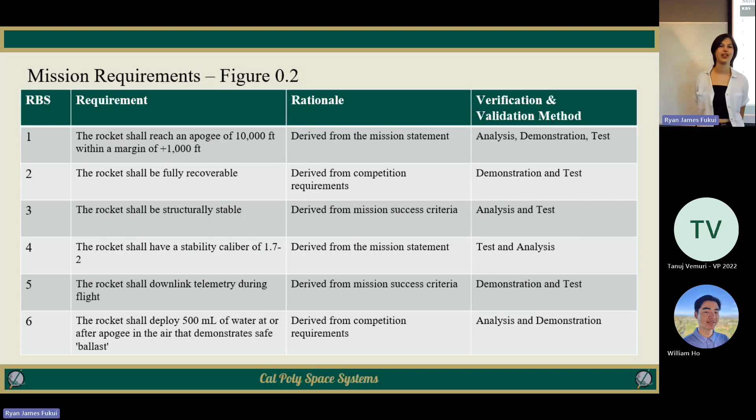So good. Okay. I guess for those of you on the recording and on Zoom, I'm the systems lead, and I just went over the requirements. I guess let's restart. I'm only going over changes for requirements and ConOps because neither of these things have changed significantly since the PDR. So the only change in requirements is adding the sixth requirement, which states the rocket shall deploy 500 milliliters of water at or after apogee in the air that demonstrates safe ballast.

And this is because FAR released their requirements in between PDR and CDR, and it said that the water release was a requirement instead of additional points. And this will be validated by analysis here at Cal Poly and also demonstration at the FAR competition. Oh, cool.

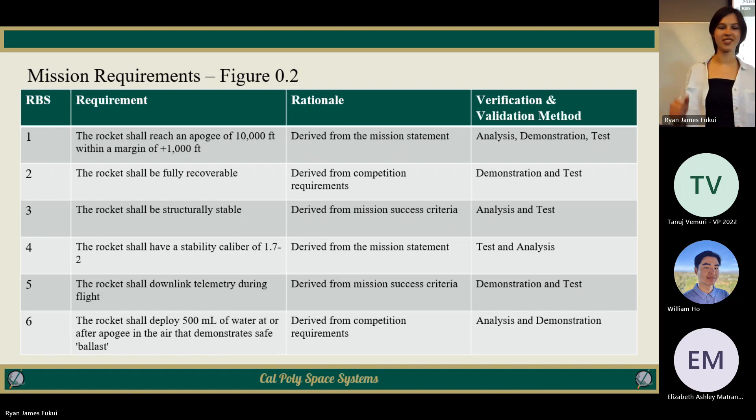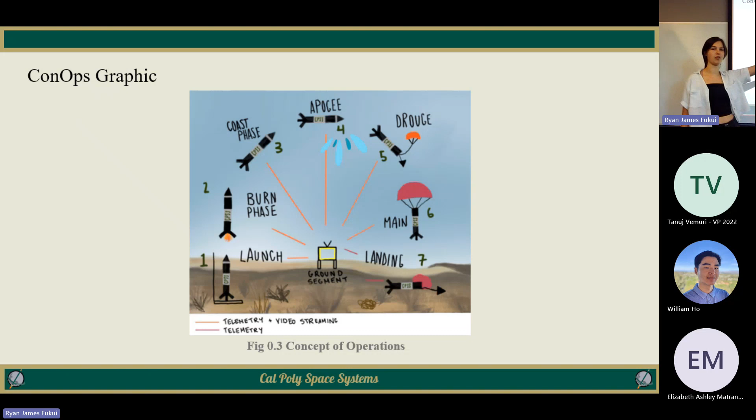Cool. Next up, we have our ConOps, which is, again, nearly identical to the PDR, so I'm not going to go over it in detail. The only change is that we have the water deployment at apogee in stage 4. The next 2 slides are also just a more detailed ConOps, and once again, the only change is the water ballast deployed, but I can stay here and have you look if anyone has any questions on the phases. Again, ConOps phase 2, nothing has changed on this slide since PDR. I'll pass it off to the aerodynamics team.

I'm back. I'm Ryan again, aerodynamics, and me and my team are going to present on some design profile stuff and analysis of that profile. So we're going to consider stability, performance, and manufacturability, as well as performing analysis on different simulations and conditions such as wind, angle of attack, temperature. So let's get that started.

Yes. Before you move on in the content, you said there would be some budget. Yes. Sorry, that has been moved to the end because I thought it made more sense since each section goes over their own individual budget. So then at the end, we bring all those together and show the total. A schedule, yeah. I don't think the schedule is fully complete, but we are working on that right now, and we have an estimate of how long it will take to complete manufacturing of our rocket.

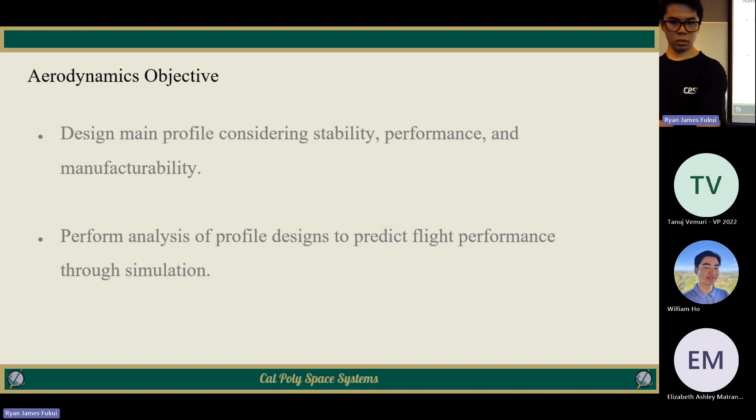Okay, here's another overview, kind of like the table of contents. First is the profile manufacturing section, and that goes over all the dimensions of the nose cones, the body tubes, and the fins. After that would be flight performance, and that has a MATLAB function and OpenRocket model. I don't know about CFD because Jack is not feeling well. So angle of attack and then weather.

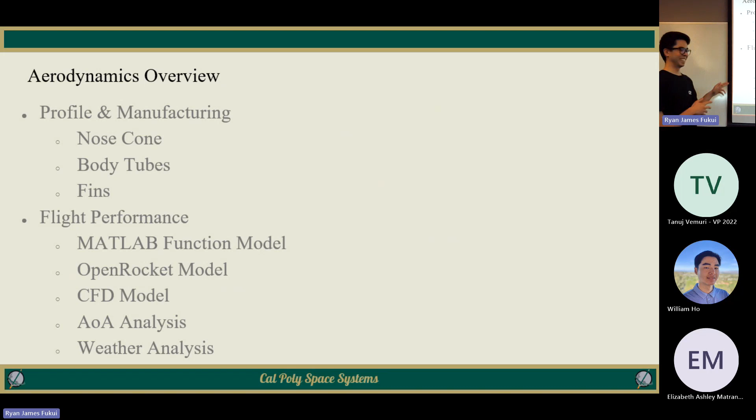Let's get started with profile manufacturing. Here is the overall model. Like I said earlier during the OpenRocket section, it's over 7 feet long. It's about 55 pounds total. And next up is going to be Tyler to present on the nose cone.

Hello, everyone. I'm Tyler. And so this is the redesigned nose cone. Before, we were going with one piece of carbon fiber wrapped around in a conical shape, but due to the payload deployment of water that's now required in the competition, we've had to modify our design a little bit, so now it's a 2-piece design.

So this top piece is going to be made out of solid aluminum, again with a conical shape, manufactured on a manual lathe, simplifying from a Von Karman nose cone. That's going to avoid a lot of hard manufacturing, just a simple angled cut. And we're going to have a 1/4-inch threaded hole in the bottom that will help attach to the rest of the system, which I'm going to show later.

Next is the nose cone transition. This is the piece that's going to be holding the water in on the way up, as well as providing the majority of the structure for the nose cone. It's going to be made out of 6 layers of carbon fiber, and we're going to do a wet layup because we haven't been able to design a way to wrap this, vacuum seal it, and put it into the autoclave. So it's just going to be a wet layup.

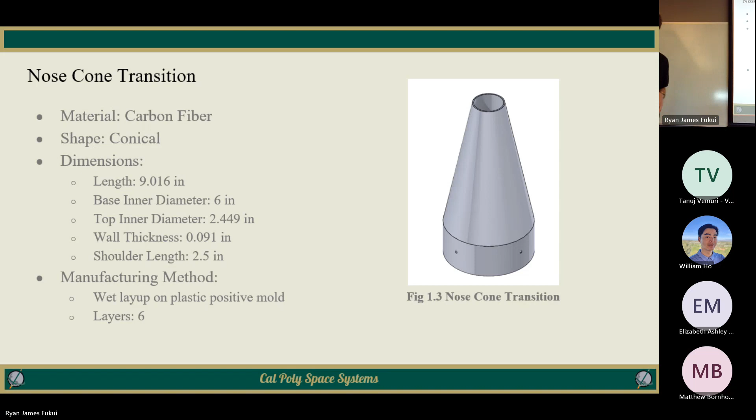So for how these are going to work together, we're going to have the nose cone tip bolted to this retainer disc that is going to be made out of any material we want. We're going to start with the 3D prints, and then we're going to test this with the expected accelerations that we're going to face to see if 3D printed plastic will be strong enough. If not, we can up it to water jet cut steel.

So on the way up, the nose cone tip is going to be held in by the aerodynamic forces and the acceleration. And then on the way down, as either the recovery system deploys or just as the rocket tips over after apogee, the nose cone tip will simply fall down, and the retainer disc will ensure that the nose cone tip doesn't fall several feet into the soil of the Mojave, while still allowing the water to get past and fully deploy.

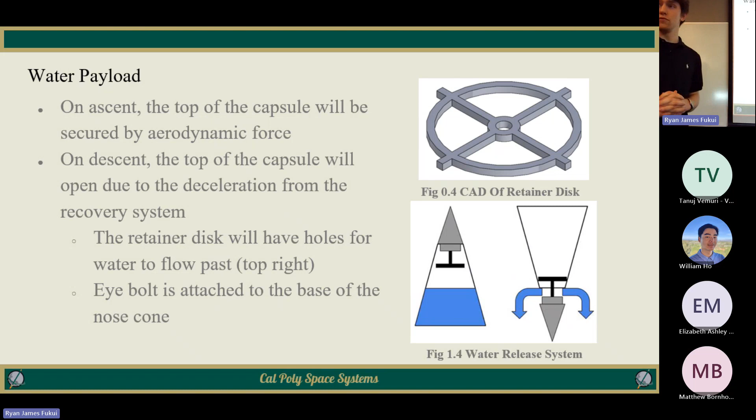I'm going to pass this on to the next system, recovery.

Hello, I'm Juan. I'll be doing the tubes and fins. So first up, we have a recovery tube. Material is still carbon fiber. Length is 27.559 inches. Our inner diameter is 6 inches, and our wall thickness is 0.091 inches. That's changed, right? Yeah, that has changed. That's a little thicker based on what structures has told us. So manufacturing is going to be pre-preg on an aluminum mandrel, and here we say 8 layers, but this is subject to change depending on which material we end up using.

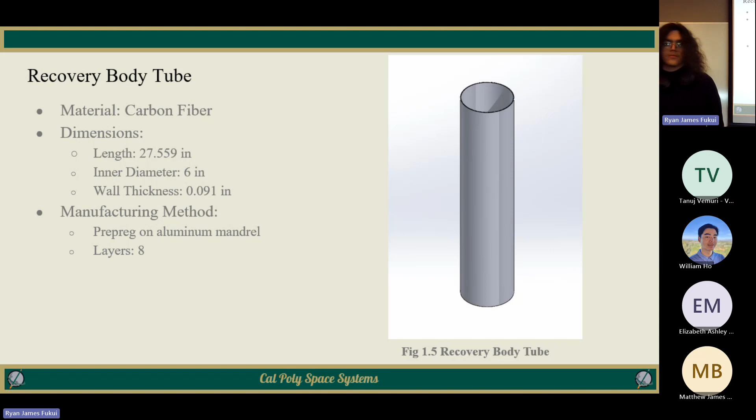Alright, avionics is fiberglass. The material's different because avionics needed it to be different for their stuff to work. Dimensions 15 inches long, inner diameter 6 inches, and same wall thickness of 0.091 inches. So we've changed from doing pre-preg to wet layup because testing results on fiberglass weren't the best. So now we will be doing wet layup. There'll be more on the testing during the structures section.

And then last for the tubes, there goes the mouse. Motor body tube. Material is still carbon fiber. The length is 33.071 inches. Inner diameter again 6 inches, and the wall thickness is, as always, 0.091 inches. And there it goes again. Okay. Again, pre-preg and 8 layers, or I guess not 8 layers, but determined by testing.

Fins. New fins. Material is carbon fiber. Here are measurements: 11.811 inches for the root chord, 7.874 for the tip chord, height of 5.75 inches, and thickness of 0.138 inches. More measurements for the fin tabs. After running through our MATLAB sim for the flutter safety margin, we found it to be Mach

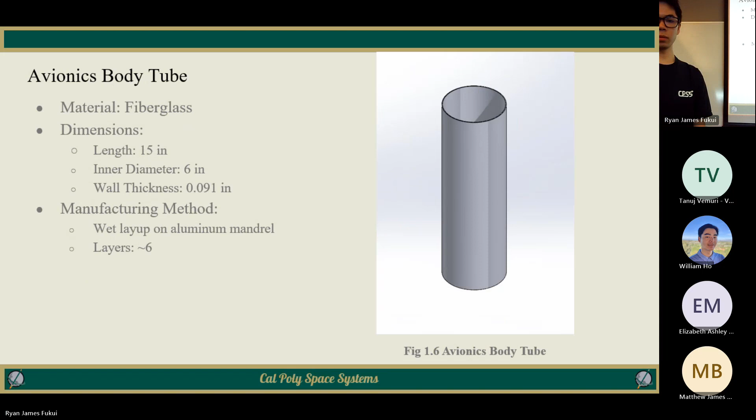Going back to the previous section. So you mentioned that the layers are subject to change. Which one? All the body tubes? All of them? Yeah, what were these layer calculations? Yes, so these layers were calculated based on the actual testing of the carbon fiber body tubes that we made. There were 3-inch body tubes that were about 8 inches and 4 inches. And we did the layers based on that calculation. However, the results of that testing were not promising.

And we are talking with a company about getting more donated. We just have to get somebody to drive down to Huntington Beach and bring it back to us. It is expired. It was for SpaceX, I believe, and they offered us 4 rolls of it. So that should be better than the stuff that was in the freezer, because you'll see in the structures section there's a slide of the results of the testing, and it shows that it is not ideal. So that's about all I can say on that.

Yeah, the layers are calculated based on the physical results of what we made and how thick that was, how many times we wrapped it around, then divided to figure out the actual individual layer thickness versus the manufacturer's layer thickness. So that might change depending on what the new carbon fiber's layer thickness is.

But with the dimensions also, were they done in centimeters? Yeah, most of the dimensions were done in centimeters, and we decided to change it to inches to make it easier for structures and manufacturing.

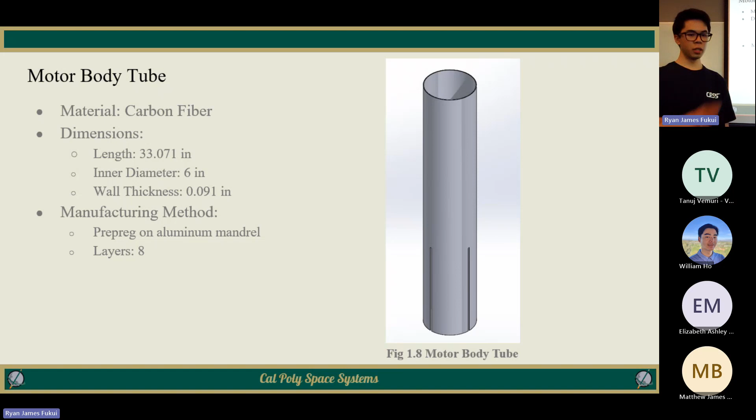I think one thing you want to be careful with, to whoever presents in the future, is significant figures. If you present a lot of significant figures like that, it's like putting a requirement on manufacturers. Yes, that is a good point. So typically, it's not in good taste to put so many significant figures when you're presenting it. Yes, thank you. We'll keep that in mind, and it's definitely important because we do not have our tolerances grounded yet, so we can't get too specific yet.

That's all for profile manufacturing. Then we'll move on to flight performance. Here are our performance goals. Target apogee is 10,000 plus 1,000. We only have the margin above because we'd rather overshoot than undershoot. Because based on what we see in the wind and temperature, angle of attack stuff, it can only go down from what the simulation says.

Maximum velocity 1,061. That's about Mach 0.95 at the launch site. That's getting really close to supersonic. Ideally, we're not going to hit anywhere close to that, and based on our calculations, we aren't there yet. So that's good. Stability, 1.7 to 2.0. That's just based on what our OpenRocket says. I think it was 1.92 on our previous slides.

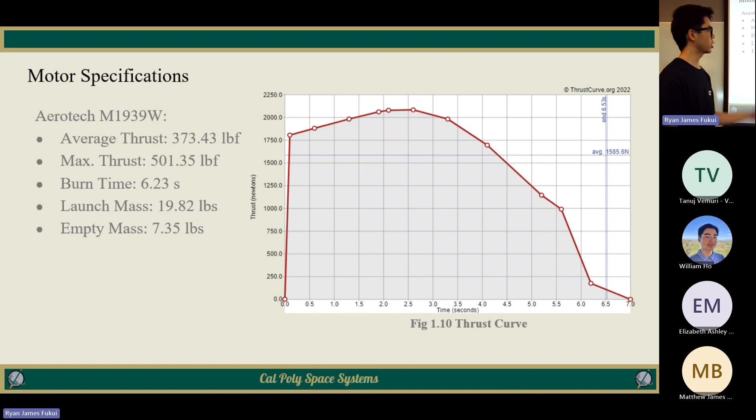I'm going to go into the motor specifications. This is kind of an internal requirement that we set for ourselves because we already have this motor, so the rocket was pretty much designed around it. It's the same motor we used last year, but the dimensions of the rocket have changed, which is why our simulations are giving us different apogees. So average thrust is 373 pound-force, max thrust 501, burn time 6.23, launch mass is 19.82, empty mass 7.35. That's all from the manufacturer. And there's a thrust curve as well. And Tyler's going to come back here and do the rocket.

So for the OpenRocket model, we were able to achieve in the no wind model an apogee of 10,820 feet. As we're leaving the launch rail, we have a stability caliber of 1.5, which is great. Anything above 1 helps keep us stable. At Mach 0.3, which is kind of the standard to measure against, we're at a stability caliber of 1.92. The max speed is almost 1,000 feet per second, which is below the Mach limit that we set of 0.95, so we know that we're not going to run into problems going transonic.

Our max acceleration, 265 feet per second squared. And now it's important to note that this is the no wind simulation. Later on, we're going to have some weather analysis based on different wind speeds and what that looks like. But in the ideal case, we are looking good.

Okay, thank you. And I am here for the MATLAB function. This is a much less precise approximation than OpenRocket because it doesn't account for wind and it's modeling the rocket as a cylinder. It doesn't take into account all the intricacies of the design. So altitude is 10,937, a bit higher, but still within our 11,000 range. Max velocity is 993, and Mach is about 0.88 at that speed. Max acceleration 243, time of apogee 25.2, flight time 250.

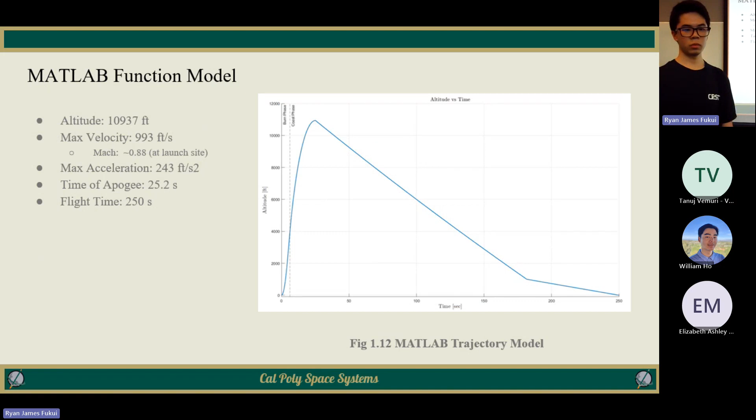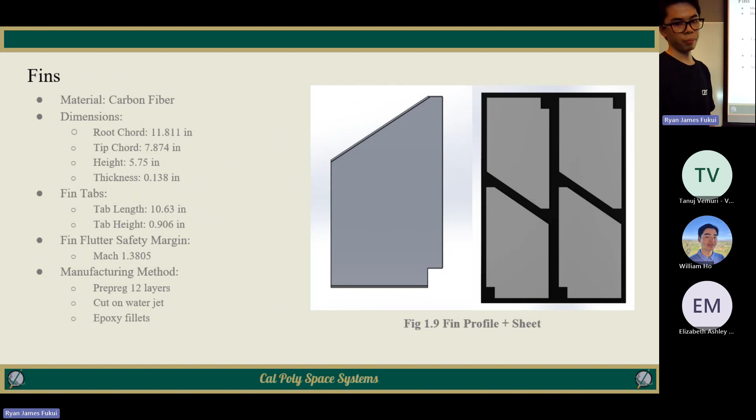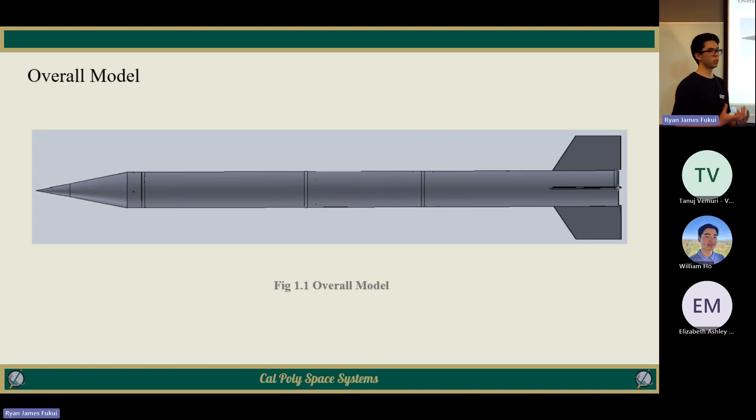I remember during PDR, your apogee was higher than 11,000 for the non-competition. And now it's a little bit below 11,000. What changed it? I guess the nose cone. Yeah, most of it was changing the nose cone, the ballast stuff has changed because now we have to have water in there and a water deployment system. The fins have also changed shape. Before, they extended further past the end, and they would have been resting on those 4 points, which was probably not a good idea to hold up like 55 pounds of weight. So this should be flat on the ground now.

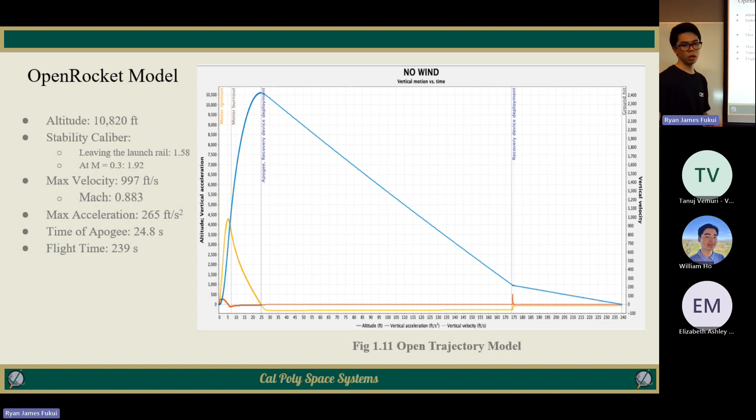The length changed a little bit to account for the different subsystems' needs, like recovery. Avionics was based on the avionics stack that has to fit inside the smaller air brakes rocket, Bebop, so we limited the avionics to that same amount. And that's about all the changes mostly.

I find the angle of attack analysis and the average weather conditions analysis was pretty insightful. Expanding, like Matthew said, with the Monte Carlo simulations and building out your probability, so you get your 98th percentile, what you expect within that range, would show further insights. I was wondering, with all of this simulation and analysis showing that the rocket would be affected greatly by temperature, which was great analysis, by the way.

What would be your approach moving forward? So would you vary angle of attack? Like if it was a hotter day on launch day, would you go up to Rick and say, hey, we have a greater angle of attack? What's your thoughts on your approach? Yeah, that's mainly my approach.

So as far as these weather simulations go, averages can only do so much because there is standard deviation to account for. And as you can see, the spread is quite different depending on the day. So the best we can really do, OpenRocket lets you turn off standard deviation and set that to 0. So it could check the exact wind speed and temperature you need, and it won't have any deviation apogee-wise.

So what we will probably do during launch day is look at the temperature and the wind speed that is happening at the launch time that we're planning on. Plug those into OpenRocket, and depending on what it is, let's say it's like 10,500, based on those wind and temperature conditions, then we'll account for that by changing the angle of attack by like 5 degrees roughly.

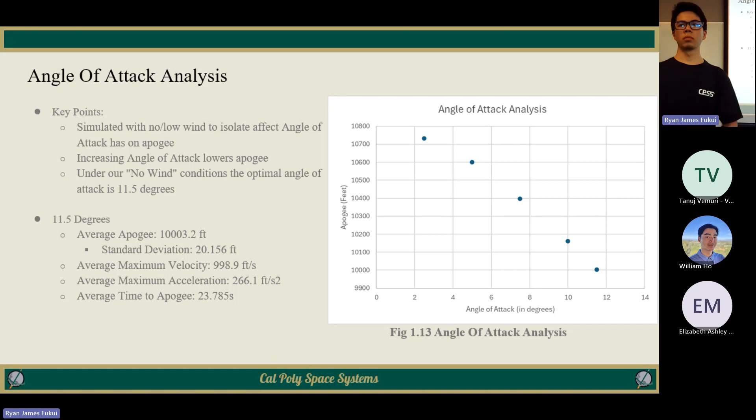And my last comment would be, I think you guys should look into the weather conditions in the morning just in case. For the air brakes project, we're having some problems ordering the motor, and we might have to order it directly to the far site and assemble it there. So just in case, we're still trying to figure that out. So what I'm saying is look into the morning.

Okay, we might launch first. I thought, okay, never mind. So new news, we might launch first. So we are gonna redo these with 8 a.m. to 12 p.m. as well, so that we can account in case we're launching earlier. Thank you for bringing that up, Ariel.

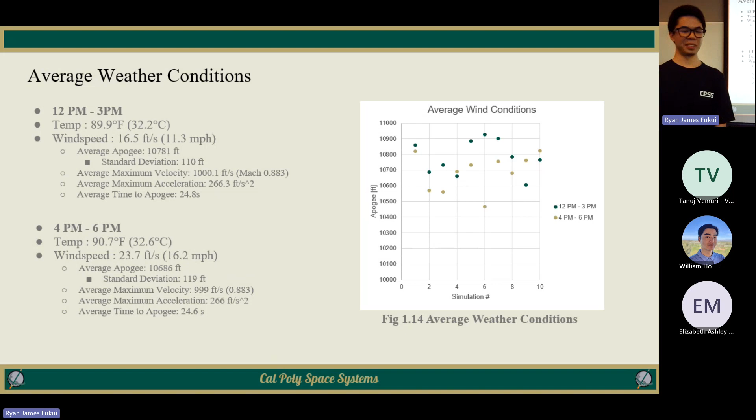As in what is keeping us, or why we don't want to? It's mainly structures, because as we're gonna bring up during structures, the numbers on that are looking a little iffy based on the material that we have. And going supersonic will introduce shocks and other forces that we will have to account for. It just will make it more complicated, and our structures team probably does not want to do that. If there's more structures questions, I'm gonna be back to talk about structures as well. But yeah, if there's no more aerodynamics questions.

Our lead is in the chat right now. She could not come today because she's sick. Elizabeth, say hi if you're here. Otherwise, Calvin is gonna be here. Hi. I'm Calvin, and I will be presenting structure slides today.

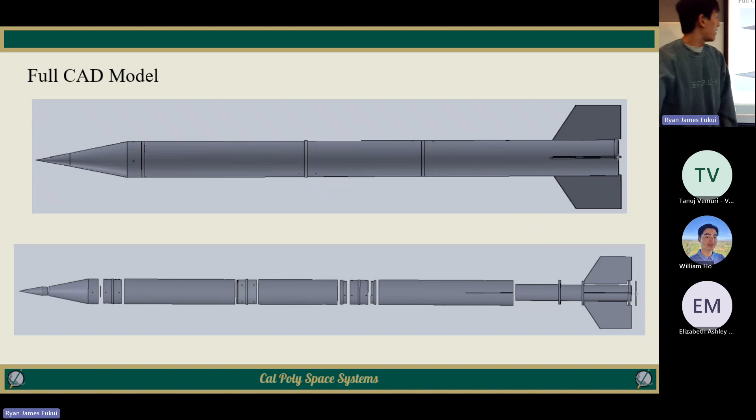So here's our full CAD model, both put together and apart. The first thing we're going to talk about is the motor mount. It's going to be a 98 millimeter cardboard tube, which is 3.858 inches, a length of 36 inches, which is more than the motor, so we're good on that. And the wall thickness on that's going to be 0.1 inches.

We'll attach 3 centering rings made out of plywood with an inner diameter identical to the diameter of the cardboard tube and an outer diameter of 5.984. The thickness for those will be 0.5 inches. And then we'll have our fins slotted in between the bottom 2 centering rings. They will be epoxied, as well as the centering rings, to the cardboard tube. And this whole assembly will be put together and then slid into the body tube.

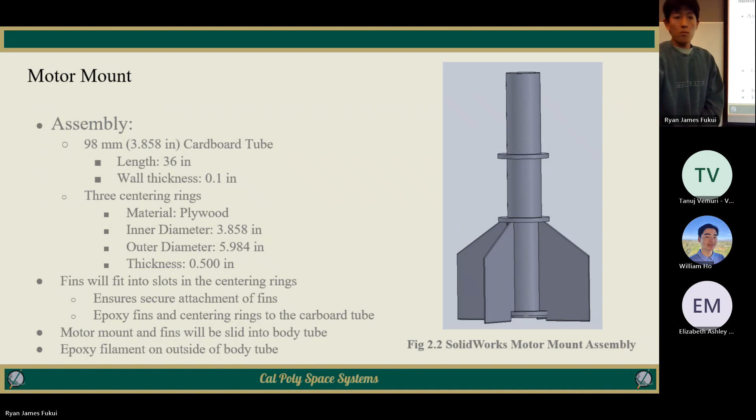In terms of couplers and bulkheads, we'll have 3 couplers and 2 bulkheads. They're all shown, I guess, in that figure there. 2 couplers are for the recovery system, and then there will also be a coupler between the motor mount and the avionics tube. Each of these couplers will have 4 M6 holes drilled perpendicular to each other, and then they'll be secured using M6 bolts. The safety factor that was calculated for each bolt is 15.2.

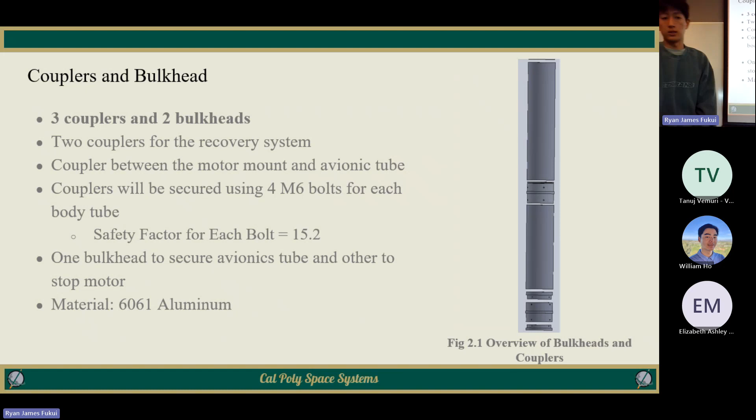Additionally, we'll have 1 bulkhead to secure the avionics tube, and another one to stop the motor from flying into the rest of the rocket. All of these will be constructed with 6061 aluminum. This is the assembly for the motor mount coupler and avionics bulkhead. Like I said, they'll be constructed using aluminum. The bulkheads will be constructed using aluminum rods, and the coupler in this case will be constructed with an aluminum tube. The length of the bulkheads are identical on each side. They'll each be 0.748 inches in length.

The diameter of the wider lip will be 5.984 inches, and the diameter of that narrow extrusion there will be 5.591 inches. The coupler will be 5 inches in length with an outer diameter, or those should be flipped, an outer diameter of 5.984 inches and an inner diameter of 5.591 inches.

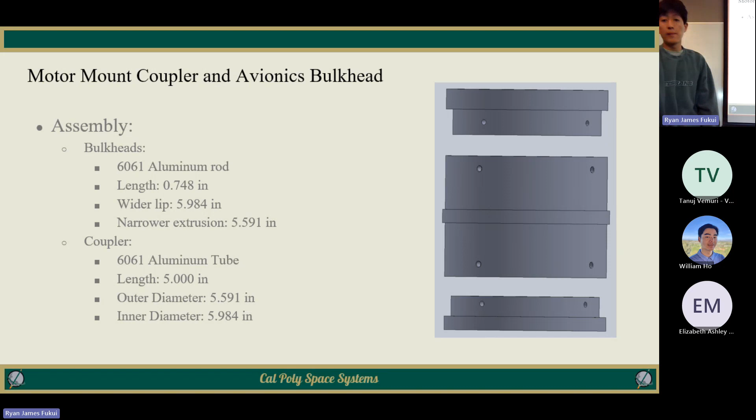For the recovery pressure vessel couplers, there will be 2 of them. The outside profile will be identical, but the inside bulkhead-ish part will be a little bit different, and Ariel will talk more about that in the recovery section. But there will be a 0.1 inch groove for an O-ring. The upper coupler will be 3 inches in length, and the lower coupler will be 5 inches in length. And those inner and outer diameters are identical to the motor mount coupler as well.

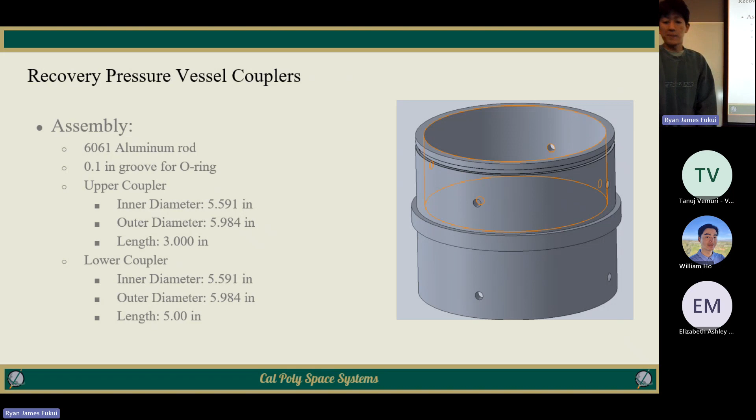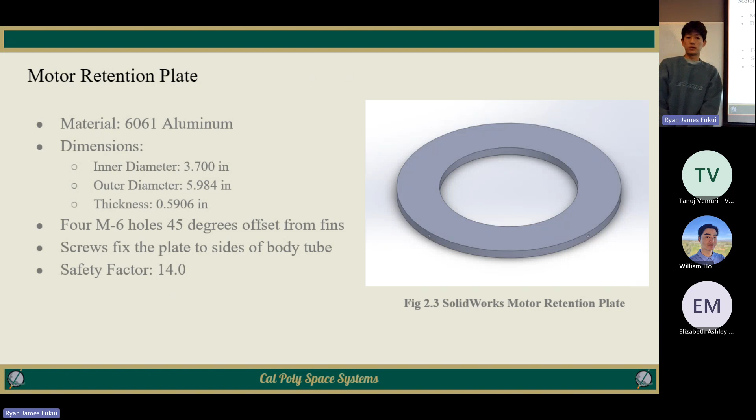Rail buttons were an issue last year because we used 1010 rail buttons, which is for a 1 inch width launch rail, when our rocket needed a 1.5 inch width launch rail to launch off of. So this year we will be using 1515 rail buttons to not let that happen again. We will either be using the standard rail buttons or more aerodynamic rail buttons for less drag, because those are what's in stock right now.

The rail buttons will straddle the center of gravity, with the lower one being placed just above the bottom centering ring in order to easily load the rocket onto the launch rail. And the upper rail button will be located just below the recovery bulkhead. We need to make sure to place these in between 2 fins so that they don't interfere when we're loading onto the launch rail. These rail buttons are taken from Apogee Rockets. The website is reliable, and FAR recommended it as well.

For rail buttons, and also motor mount, do you have manufacturing plans? Because I know last year those 2 were kind of bad putting in. In terms of how you're actually going to get the rail buttons in there, because last year we did a jank little magnet way of getting it in there, and I don't know if that's gonna work. We do not have manufacturing plans yet. Yeah, because both of these spots are not the easiest to get to. So we'll definitely have to look more into that.

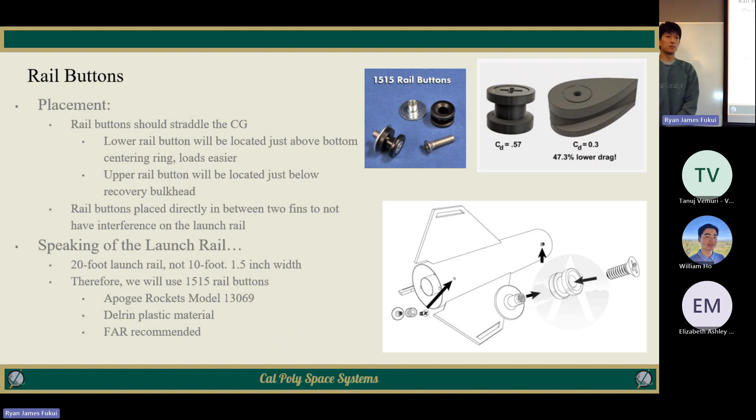And then the motor mount shouldn't be too bad. We just have to, again, make sure we put that in after everything else.

For material justification, we're using 6061 aluminum. It's been used on many different things, such as pipelines, aircraft, and automotive parts. It's reliable under large amounts of stress, and it has a high strength to weight ratio. Additionally, it's an easier material to work with in the shop, so that'll make the manufacturing team's job a lot easier. We also have some extra aluminum in the hangar that we could possibly use to save costs as well.

For fiberglass, we're going to be constructing one of the body tubes out of fiberglass because even though it has less tensile strength than carbon fiber, we need it to allow the radio signals from the avionics section to go through, because carbon fiber blocks the signals, so we wouldn't be able to get anything from avionics if we use carbon fiber. And then carbon fiber, we've had experience with; it's strong, low density, and easier to mold.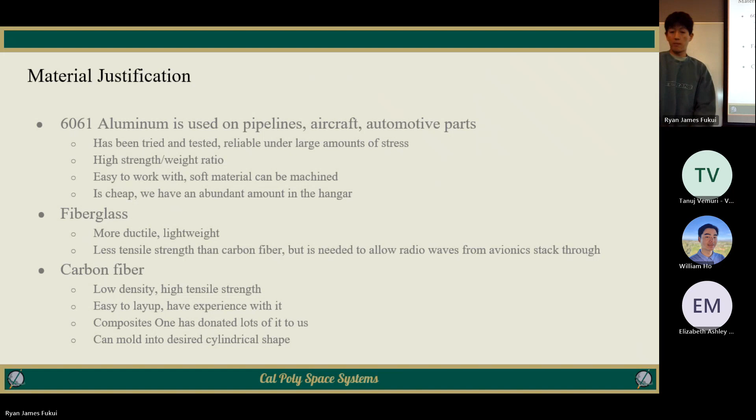Okay, and now I'm gonna be, thank you, Calvin. You're gonna have to come back after this though, I think.

So I'm gonna talk about the testing that we did. These were, like I mentioned earlier, about 3-inch diameter tubes. The short one, or the small one, we were recommended to do about 1 inch tall. The medium one was our 3-inch one, and the long one was about 7-8 inches.

So as you can see from the carbon fiber, it does not look good. The results of our compression test were 70 megapascals. The manufacturer data says the compressive strength should be 552 megapascals. That's not even a fifth. It's almost an eighth of what it should be. This is probably due to the freezer, or we just did a really bad layup.

Considerations: the wall thickness was greater than the fiberglass samples, so the wall thickness was about 0.3 centimeters, and the actual one should be about 0.23. So it was a little thicker than it should have been, but the fact that it was thicker and the compressive strength is still way underneath, I think making it thinner wouldn't help our case, because that would be counterintuitive.

New donated carbon fiber: like I mentioned, Huntington Beach has carbon fiber just waiting for us that we have to go get. Hopefully someone will be able to get that as soon as possible before we start actually manufacturing.

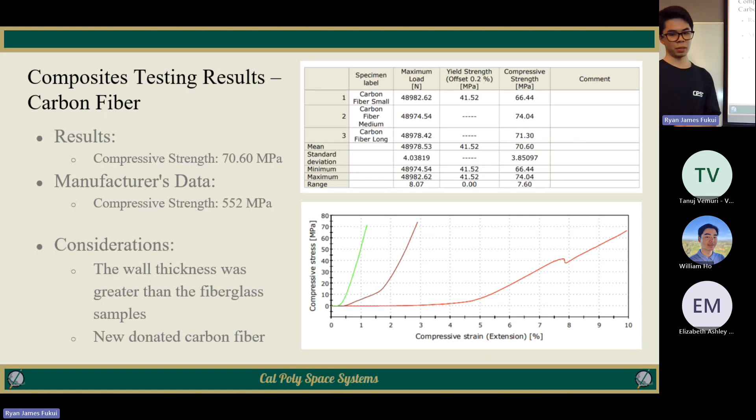There are the graph numbers, and that's about all I've got for composite testing. Oh, and these walls were about 0.1-ish, so they're about half as thick as they should have been. The thickness that the manufacturer gave us for this fiberglass is way off from what it actually turns out to be. We thought it was gonna be 0.74 millimeters, which would only take 3 layers to get as thick as we need, but it actually was more like 0.26, a third of what the manufacturer said. We ran into that issue last year as well. We just did another wet layup over that to make it thicker. That's everything for composites. There's no questions in the chat.

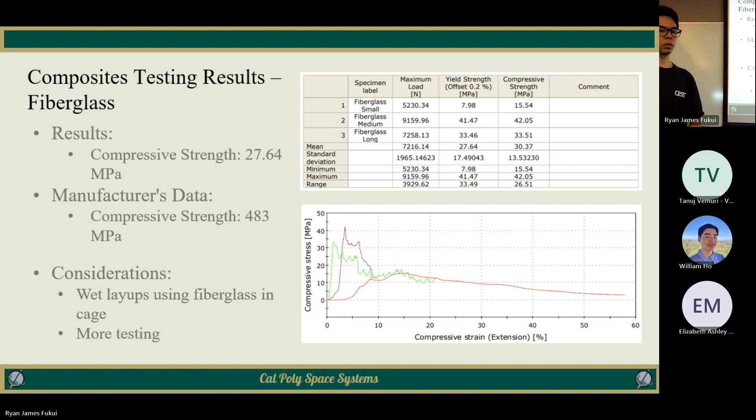Okay, cool. Calvin, you're gonna have to come back to these calculations. Oh, Ariel's coming up now.

Hi, I'm Ariel. So for our structural strength calculations, our first one is the rocket compressive loading due to aerodynamic forces. Our safety factor for fiberglass failing is 17.5. The compressive strength is 35 megapascals. For our carbon fiber, it's 35.2, and our compressive strength is 70 megapascals.

And our safety factor to fail in collapsing failure mode: you have the length over the diameter value, and this is greater than 15, which is good. So our minimum length of our rocket needs to be 92.126 inches, and our actual length based on this number is 92.126 inches because we had to shrink it down. And then our ratio of the diameter to the thickness is greater than 70. So based on this, we changed the wall thickness. Our minimum wall thickness is 0.091 inches, and our actual wall thickness is 0.098 inches.

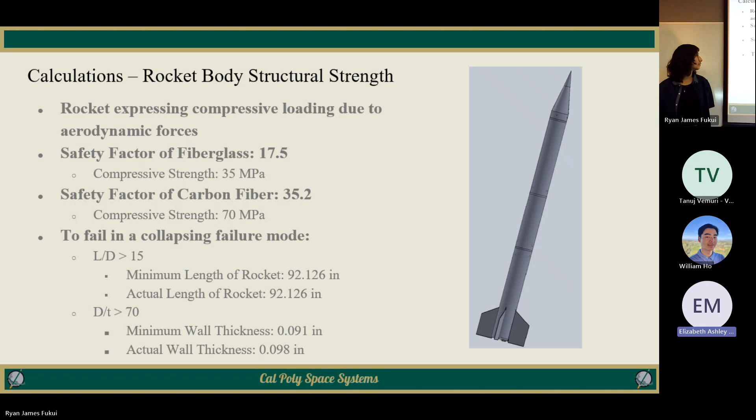And in terms of why we can't use this carbon fiber, this is for an ideal situation if the rocket was flying straight up. The other situation accounts for the bending, which would be from the wind, and most likely there will be wind. The wind this is calculated at generates an angle of attack for the rocket of 5.5 degrees. The average would be around 3.5, which still has a low safety factor, and it's using a different mechanical property of the carbon fiber than the other calculation. Does that make sense? Yep.

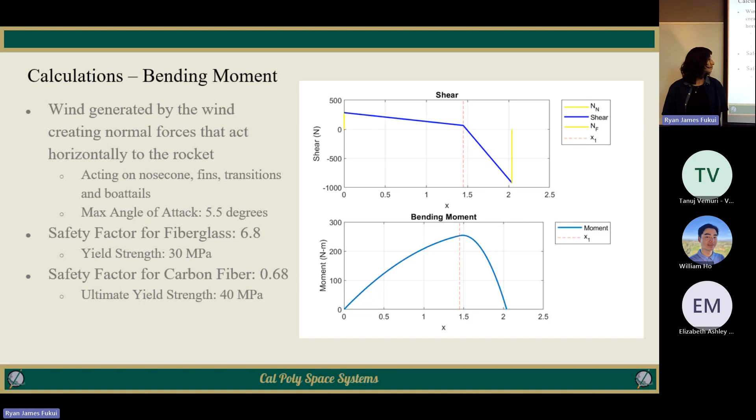Did you say there was a question in the chat? Yes. Yeah, it makes sense. Yeah. Was there a question in the chat or did you answer that too? I answered the question in the chat. Okay, cool. Okay. I think we're just gonna move on to recovery then.

Yeah. So that's me. I'm Ariel. So for our outer profile, we're making a pressure vessel again from carbon fiber. So that's gonna be our body tube. And then the two aluminum couplers on each end. There's gonna be a clearance fit, which I'm gonna talk about a little bit later, between the top coupler and the body tube. The bottom coupler is gonna be secured with 4 M6 bolts. Then there's gonna be an O-ring between each of the couplers and the body tube to create that airtight seal.

And then for our through holes, we're gonna have 1 3/4 inch eye bolt located in the center of each coupler. And then specifically for the bottom coupler, we're gonna have 2 Peregrine holes. And then we're gonna have 2 holes for the TD2 system, which I'm going to talk about later too, because this is a switch up from PDR. This is just gonna be another hole to drill to kind of secure it in. This is for our main chute deployment system.

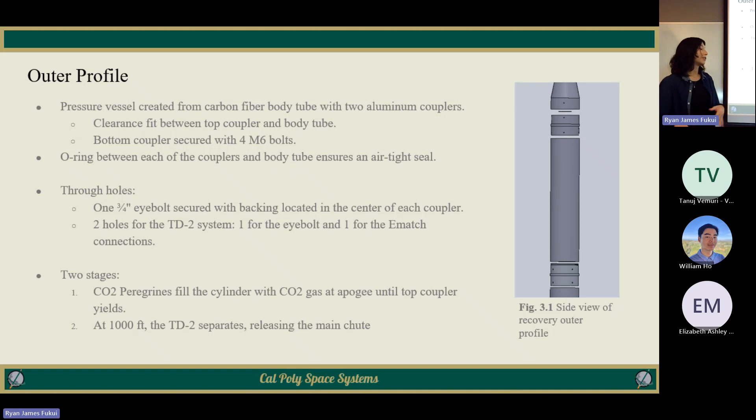So for our 2 stages, for our drogue chute deployment, we're gonna have the 2 CO2 Peregrines fill up the cylinder with CO2 gas at apogee until the top coupler yields. And then at 1,000 feet, the TD2 is going to separate and release the main chute. So this is a layout. This is the same as PDR, except for the bottom instead of Tender Descenders. There's another little system. So yeah, O-rings up here, body tube, shock cord is like the big squiggle. The parachutes are in red, and then coupler is in red, and bottom coupler is in red.

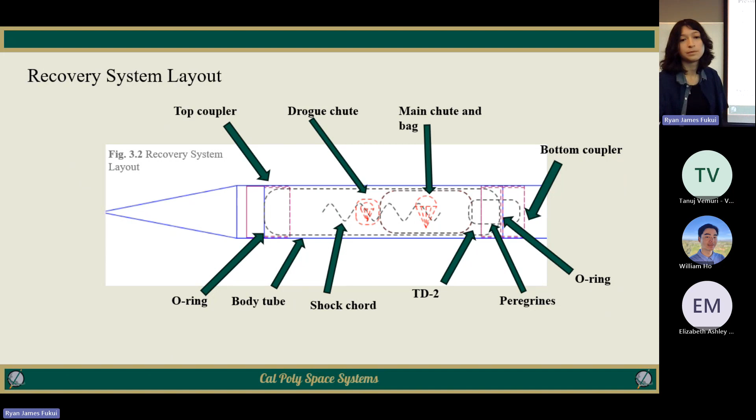So for our calculations for carbon fiber, this is ensuring it doesn't break on the way up, and also when we release the CO2 into the pressure vessel. So our ratio of the wall thickness to our diameter is 0.2711. And so we can determine from this, it's a thick-walled pressure vessel. So we're using the thick-walled pressure vessel equations. And so for our safety factor for carbon fiber yielding upon CO2 release at 10,000 feet exactly, we're going to have a huge safety factor of 37,449. So it's not going to break. This carbon fiber is pretty strong, so that kind of makes sense. And we had similar numbers last year.

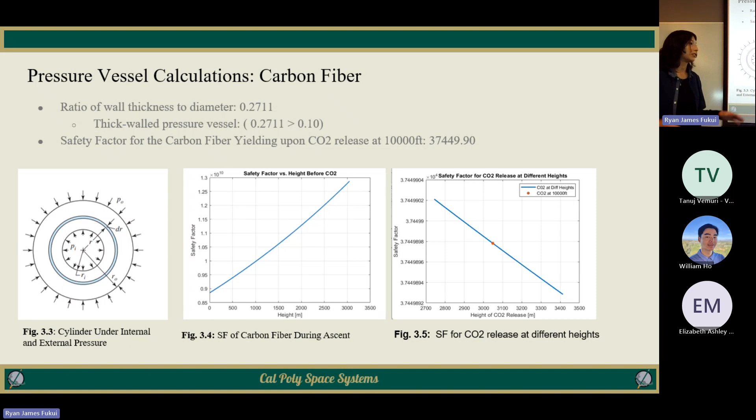So for our bolt calculations, we're using M6 x 1 bolts, and we're connecting the bottom recovery coupler to carbon fiber. So for our shear bolts failing from pure shearing, we have 5.87 as our safety factor. And for them failing from edge shearing, we have 155.24. Our shear pins are only going to be used if we create too much of a clearance fit and we need something connecting the top coupler to the body tube. But these need to fail after we release CO2. And so that's going to be a safety factor of 0.22. And that's good because it's less than 1.

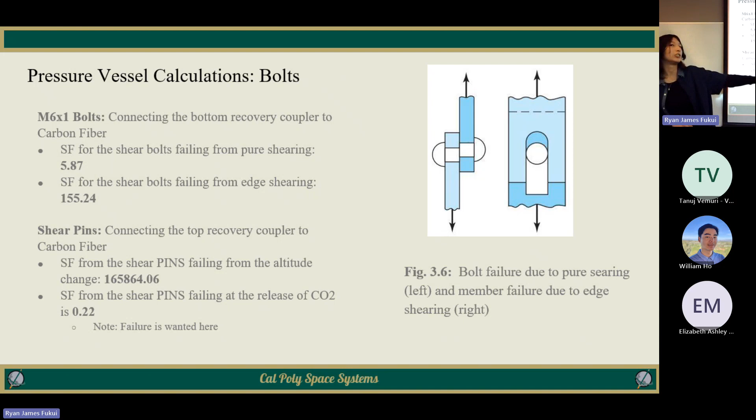And then for them failing on the way up, that's 165,864. And then on the left, you can see a depiction of pure shearing versus edge shearing and what that looks like. So for our clearance values, I put a quick note here that shear pins may not be needed if the clearance is tight enough, but it's going to depend on manufacturing and how good we are on the lathe, basically.

So our target clearance is going to follow the preferred mechanical tolerances for metric ISO 286. This is from engineersedge.com. But the recommended tolerances, you can see on the bottom, it says locational clearance fit provides snug fit for locating stationary parts, but can be freely assembled and disassembled. So we're using the H7/h6 standard. And this gives us a tolerance of 0.001 inches of clearance. So for our coupler diameter goal, we're shooting for 5.983.

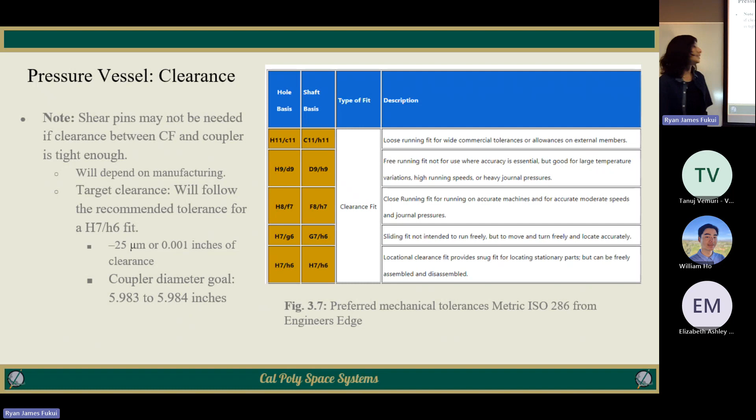So then for our O-ring sizing, we are using our McMaster oil resistant O-ring. The inner diameter when it is stretched is 5.768 inches, and our outer diameter when it is stretched is 6.004 inches. The thickness is going to be 0.118 inches, and this is straight off of McMaster. But it is a 90A durometer rubber O-ring. And then these sizing recommendations are found from parkerorings.com and based on our coupler dimensions.

So for our inner components, we first have our Peregrine. So this is the same as PDR. We're using two Peregrine kits from Tinder Rocketry, and they will be used to release the drogue chute, and they will just be on either side of the eye bolt. And I also did a quick check a couple days ago, actually, just to make sure everything's going to fit in there because of the smaller diameter than last year. But yeah, they will fit fine in there, so we'll have plenty of room.

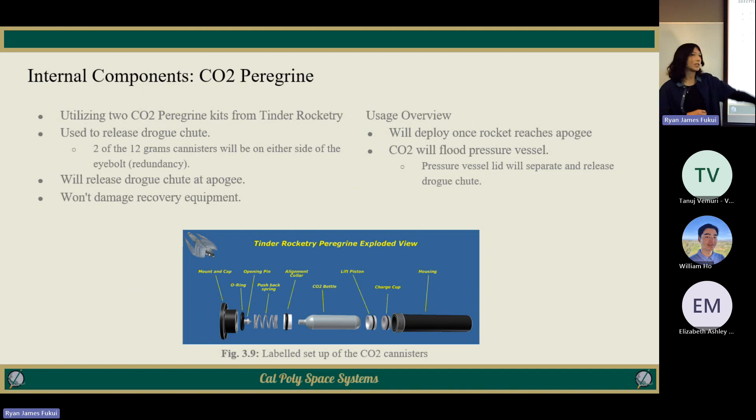So for our internal components, I mentioned earlier that we're switching from Tender Descenders. This is because they're sold out everywhere. So we're going to use one TD2 from Tinder Rocketry. This is the same website that sells Tender Descenders, except this is kind of their new and improved object that they've been working on. There's two different types. We're going to use the top one there with the nut in the back of it. They work similarly to the PRM that we used 2 years ago. It's a pyrotechnic initiated release device, which just bolts on the surface of the bottom coupler, and then the eye bolt separates off.

These are the best replacement for previously used Tender Descenders. There's also some other options, but they're not as trustworthy as just using an eye bolt connection because they're not as strong. And considering we have a huge rocket and a huge parachute, this is probably our best option. So they're going to deploy with the altimeter at a height of 1,000 feet. The black powder is going to cause the eye bolt to separate off, and the drogue will be allowed to pull the main chute from its bag.

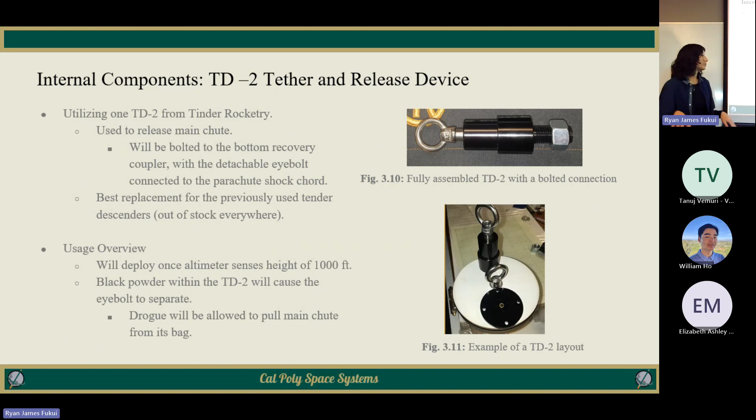So for our altimeters, we're using the same ones as last year, the StratoLoggers. These are FAR recommended, and we're using a standard 9-volt alkaline battery, and they're compatible with e-matches from MJG Technologies. So each one is going to be connected to both CO2 canisters and programmed to sense zero velocity, and connected to each TD2 system and programmed to sense 1,000 feet altitude.

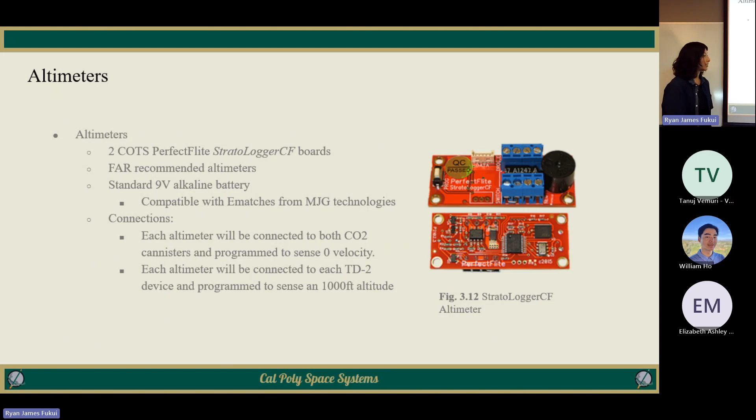So for our recovery calculations, these are slightly altered from our different mass. For our chosen parachutes, we still have the same ones, 120-inch main chute and 30-inch drogue chute. We're reusing our previous parachutes to save on money. And they have a high coefficient of drag and small packing volume. Our ground hit velocity from Apogee Rockets equations is 4.77 now, which is a change of 0.02. From our OpenRocket simulations with no wind, it's 4.5 meters per second.

Our drift, we calculated for 5 mile per hour winds, is 4,679.5 feet, and then you can see the metric equivalent. And then for 30 mile per hour wind, which hopefully we won't fly at, is 28,077 feet. And we also checked to make sure FAR has no requirements for maximum drift, and they don't, so that's good. Our shock cord length is 25.9855 feet. And yeah, I should change that for sig figs.

Our packing volume is, we have 14,492 centimeters cubed available to us. And for our largest components, and this is our shared parachutes and shock cords, that is 4,553. And our rationale for this is to overestimate the volume because we ran into issues last year.

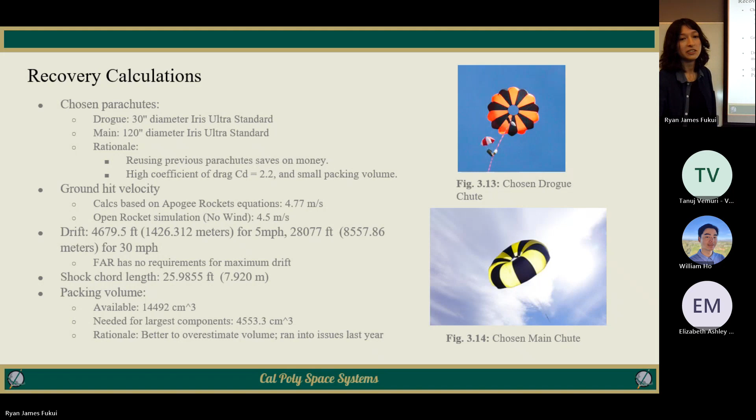So for our parachute materials and preparations, we're gonna detangle the parachutes again. There's a bunch of different resources on Fruity Chutes detailing how to detangle parachutes. We're gonna go through these. We're gonna teach people how to fold a parachute, which is a Z folding technique. We're going to show how to pack the main chute in the recovery section. And we're gonna use smaller quick links and duct tape so they won't crash into the body tube this year.

For our materials, these parachutes are made of lightweight 1.1 ounce mil-spec calendared ripstop nylon. This is directly off the website that we bought these parachutes from. This makes parachutes more compact and lightweight, and they're zero porosity and resistant to mildew and rot. And they can be used again, and they're very reliable.

And so for our propulsion lab testing, we're going to do the TD2 testing late winter quarter as soon as we get the procedures done. We planned to have the procedures for PDR or CDR, but because of the switch up we had to make for the tender descenders, these are not done yet, but I don't think the process should take too long. The safety trainings will be given by me and Peter. And we'll give the propulsion lab safety briefing and black powder safety training.

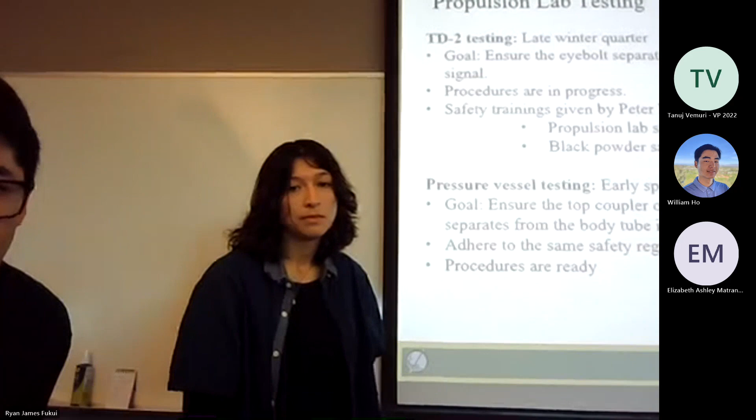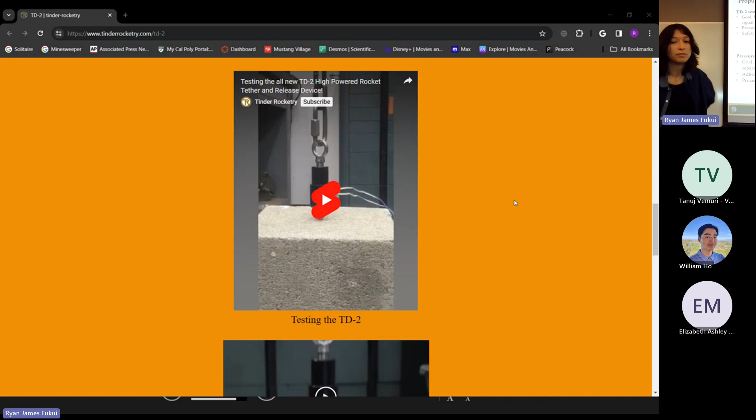And here's a little video of what. That doesn't work. You're not using the mouse. Yeah. Okay. Oh, there it is. This is kind of how a test is run. It's not showing. So obviously they put a cinder block on the, wait, okay, do you have to drag it? Is it showing? It's like a yellow screen with a video on the front, a YouTube short. I tried to avoid using the YouTube short. Yeah, it's showing the yellow screen. Okay, nice. I'll just play this. I'll just zoom it out. Really small though. Sorry, everybody in person. I can turn my laptop around. I don't know how to get it to go over there now. Okay.

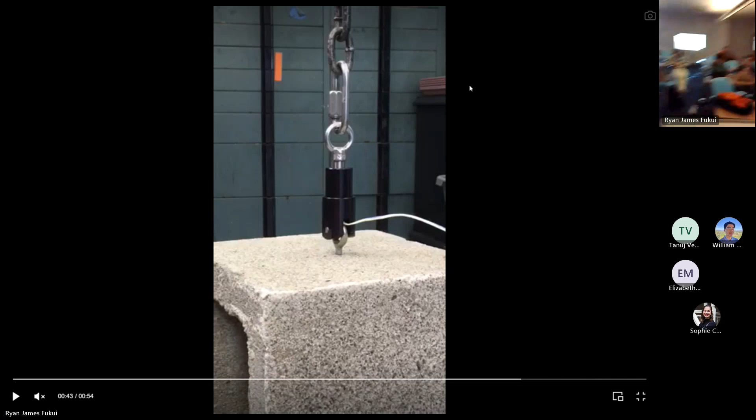Here it is. So that's how it's connected. We're not gonna place a huge cinder block on the bottom of it because that's not really necessary. But yeah, it just separates like that. And then the E-matches are connected like over there. It's like a pretty simple test to run. It's really similar to the Tender Descender test we ran last year. Just looking at it to separate.

It says y'all have many parachutes strewn about of all sizes. Yeah, we got a lot. I just found more. A huge box.

Okay, and then for the pressure vessel testing, this is early spring quarter once the whole thing's done and manufactured. This is ensuring the top coupler successfully separates from the body tube in a safe manner. We're gonna go by the same safety regulations that we talked about earlier. And the procedures for this one are ready, so that's good.

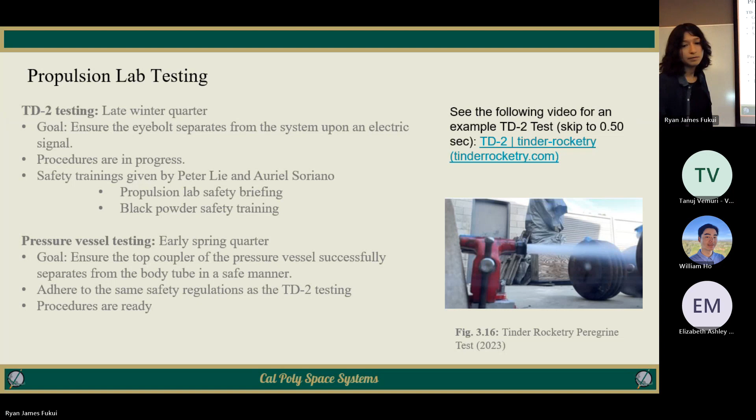Fabulous. Yeah. Comment. He said you should add a load when doing the separation test. Okay, so like the cylinder, there's probably stuff in the props lab. I'll just grab some and put them on there.

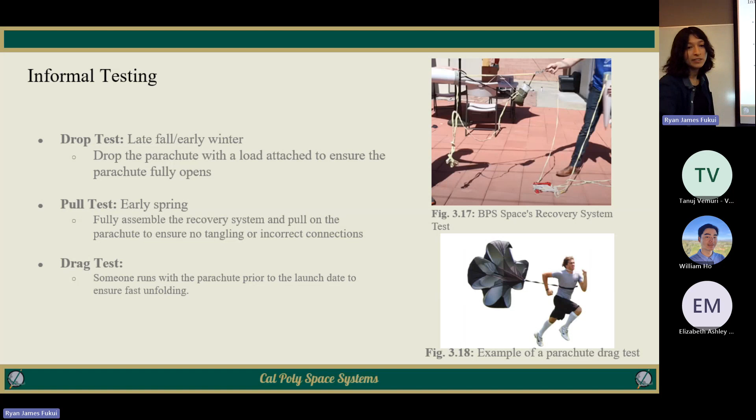So we're buying 3 more of those, and then a housing cap assembly because epoxy got on the other one of the Peregrines, so it kind of made it unusable for this year. It's just permanently stuck in the bottom coupler. So yeah, if we're buying one of those, you can just order these parts off of Tinder Rocketry. It's super easy. They come individual.

So then we also need more E-matches this year because the whole club has been collectively using ours. So we're just gonna get 2 more packs of those, which is 20 in total. That's enough for testing and for launch and to have extra. And then for our O-rings, we're getting a pack of 10 from McMaster because they're just sold in packs of 10. This will allow us to have extra, because last year when we were doing it on the lathe, we ended up making some O-rings unusable because we were trying to gauge them for sizing.

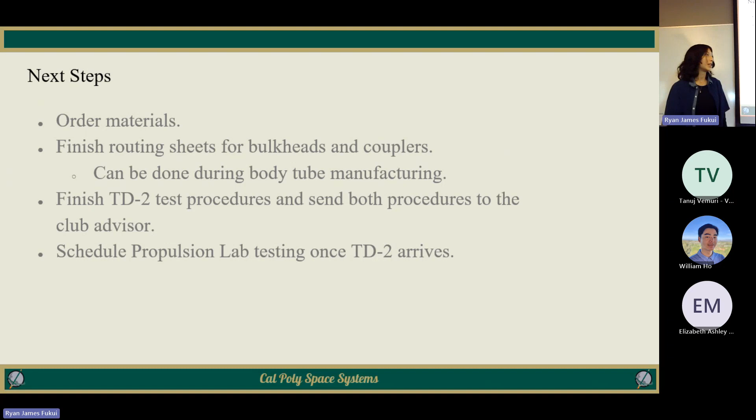Thank you. Quick question on your calculation. Was that assuming the rocket shoots perfectly straight up without any angle of attack? Yeah. This is with 5-mile-per-hour winds and then 30-mile-per-hour winds. Okay, but without any angle of attack? Yeah. Okay, got it. You might want to check how angle of attack might affect that. If you were to launch at like 5 degrees, for example, that might make it more annoying when we're out there.

And then if it is heavy winds, since it would be so far, that could act as another consideration for which we should go first. If we walk at like 10 minutes per mile, and it's like 5 miles away, there is that. But other than that, nice. If we launch air brakes first, it will not go that far. Yeah, we want to do our trek at the end, probably, because then we would have to take time for the trek and then to transfer.

I don't really want to do a 10-mile hike in the desert, so we're not launching if it's 30 miles per hour wind. I'm calling it there. I mean, we could use a smaller chute. 84 inches and that's safe though. You think they'll let us launch it? I don't know. I don't think so. Hopefully not. I'm fine with doing a 10 mile trek, just as long as it's at the end of the day. Okay, you can go get the rockets then, Will. We'll wait for you.

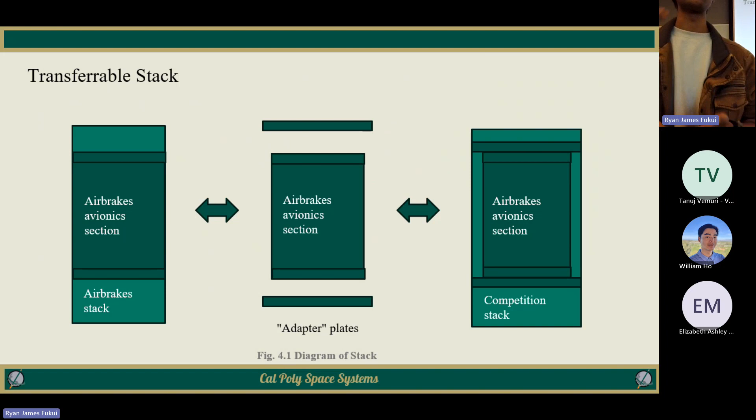We're not too certain about plate mounting yet because we haven't totally finalized PCB dimensions. We're rather close though. Regardless of whether we're vertically or horizontally mounting, we're planning on 2 to 3 plates. One plate will be our primary PCB with all of our sensors. Another plate will be our antenna and RF module. And then we'll have another section for batteries and power. And that's last year's stack for reference, if we aim for a horizontal mount.

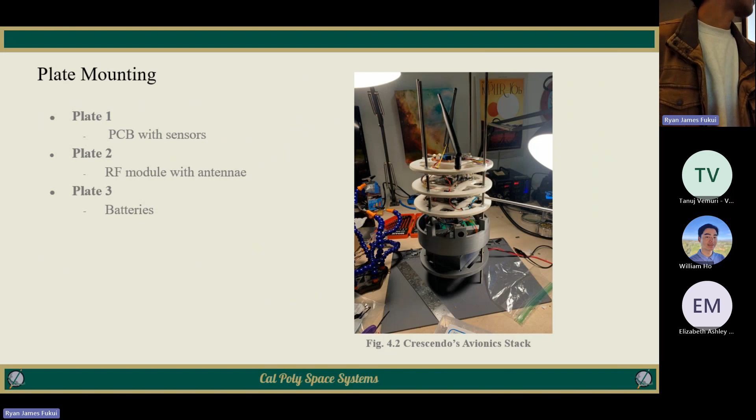So as far, we're basically planning on having 3 IMUs and 3 altimeters. Those are sort of the most key components. And when you have 3, it allows you to have redundancy if one of them goes out, because you can just take the median of the 3 data inputs. So if one shoots really high or really low, you still get the correct data.

I think we did end up, we were able to choose a camera. Although, yeah, that's a little outdated. Yeah. Although we are probably going to keep that separate from the actual flight board, and that's going to have its own separate antenna that comes with the camera.

And just to be clear, we're aiming for 3 separate camera systems. Cameras are typically 120 through 160 degree field of view. For FPV racing drones, we're using those cameras. So 3 of them provides 360 view. We want to not run them through the teensies because video takes a lot of data. So we're having separate ground to air radio channels for each camera.

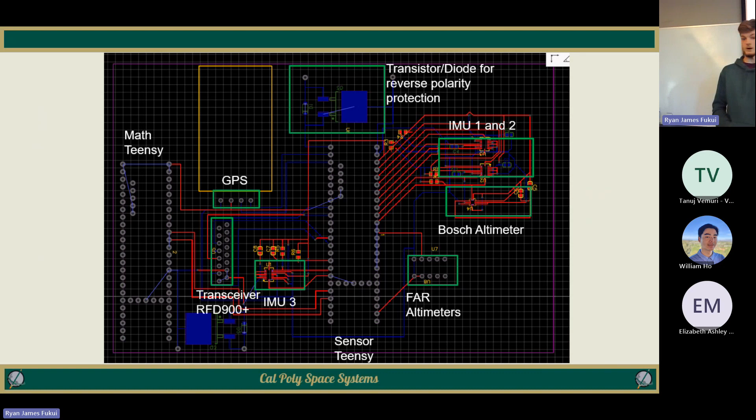The other thing that's going to need to be powered separately is the transceiver, regardless of which one is used, just because it takes in so much more current than everything else, and it can't really be run through the teensy. And because of that, we have two separate transistors and diodes just for the reverse polarity protection, because that was a problem last year, I believe. It kind of fried some stuff. So we have that now. So if something happens, it should be largely safe from that. I think that's about it.

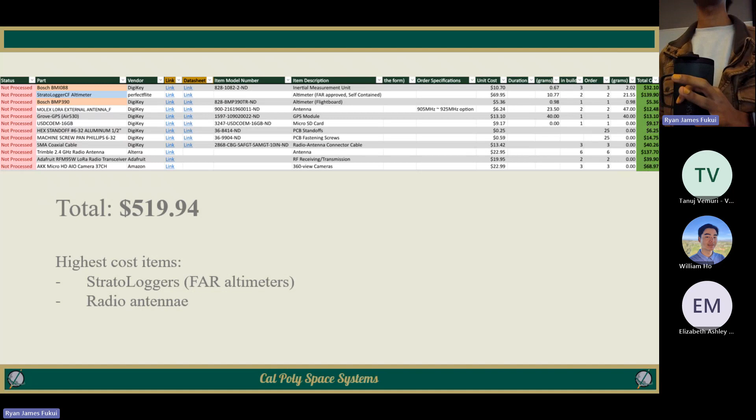Any more questions for avionics? Cool. Thanks for avionics. Coming back for the final budget estimates. And let me also pull up what was approximated, what we're being given by the treasury. We're over budget, but that's including the $400 worth of metal we're not spending anymore. So we're back under budget, which is good.

We're given 1,541 roughly. We've already spent the aerodynamics money. And so the total cost is more like 1,200, and this is including all the avionics stuff, which is technically for both rockets. So if we need to, some of it can come out of the air brakes budget as well. It's your rocket too, Will. Avionics, yeah. So that's a lot of money for avionics. Hopefully we can get some of those parts back from the original stack.

We think Trace has it and he has not responded when we have messaged him or reached out to him. So we might just have to walk up to him and say it to his face. Yeah, so if we can get some of those avionics stuff, that would save us money. Recovery is pretty set. Aerodynamics is pretty set. It's just about 400 off of structures and however much we can salvage from last year off avionics. But we are under budget. It should be about 1,200.

Yes. I'm gonna say, assume that you can salvage nothing off the avionics. Okay. Because we're not sure the status of the boards, and I think the StratoLogger was Ryan Westcott's. Okay. And the video unit was also Ryan Westcott's. And the stuff that we actually paid for was all the SMD components on the board, which we're not gonna salvage.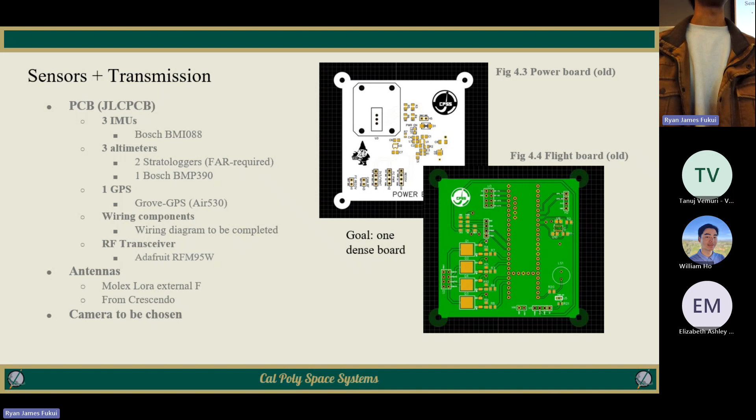Waits for SMD stuff. Sorry, SMD stuff? I don't know, sorry. No, yeah, sorry. I just, you're kind of the interface to Tanuj. Okay. Yeah, that's great, put them on, I'm assuming you can. Okay, I'm not a very electronics oriented person. What do you mean by SMD? All the components on your board. Oh, got it. Okay. Cool. Any more questions? Thanks. Tanuj said that we should consider using hot plates, because he used one in the EE building. So that might help.

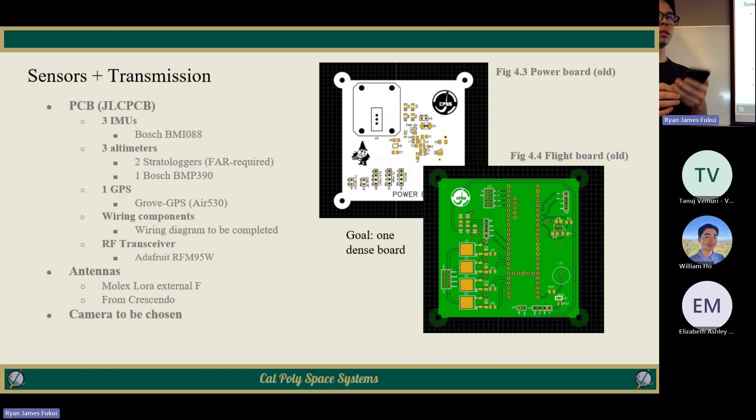Okay, I'm gonna go back to schedule. Any questions on the schedule? Manufacturing is planning to be done concurrently with air brakes, which is gonna be a little stressful, but the estimate for how long it would take to build one rocket was, being conservative, like 7 weeks. We're week 6 of winter, and then we launch week 9 of spring. That's still like 15 weeks.

It'll only take 7 if we're really good. But assuming we're not really good, it's probably gonna take the full 15. It's 14. That's testing and troubleshooting and all that stuff.